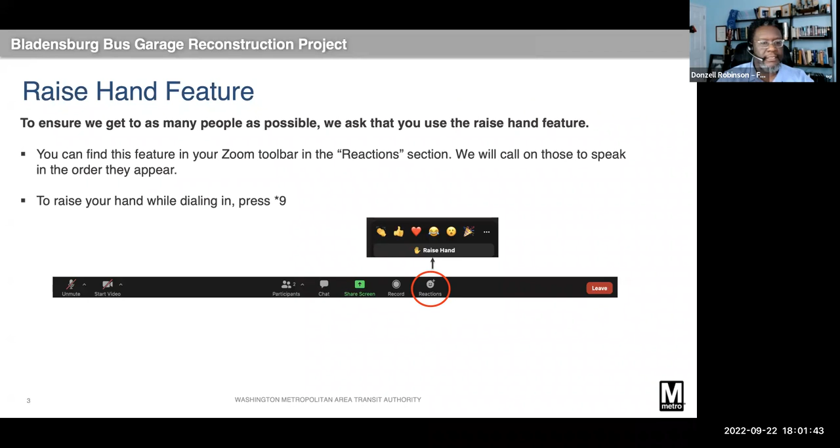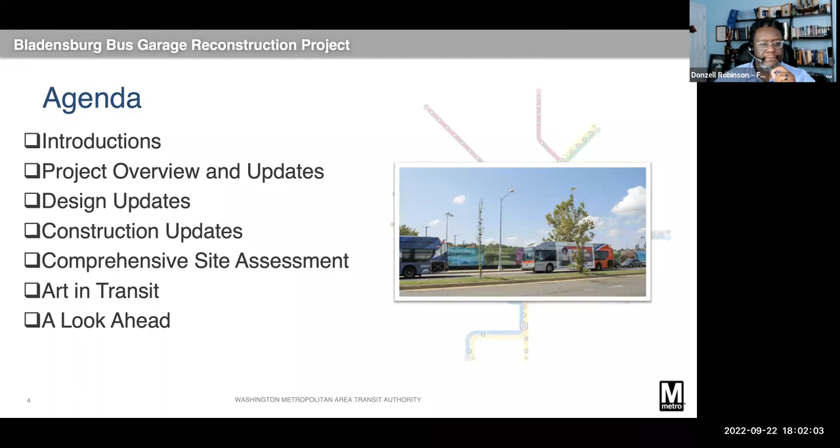This evening we are going to cover introductions, project overview, design updates, construction updates, site assessment, and art in transit, as well as next steps for the remainder of the quarter. With that, I'll turn it over to the team for introductions.

Good evening, I'm Jameelah Muhammad Ingram, and I'm here to introduce the team. We have Diana Levy, the Director of Capital Delivery; Sean Pratt, the Project Manager; myself, Deputy Project Manager; Daniel Goucher, Project Manager for Hensel Phelps; Laurent O, the Art in Transit Program Manager; and Jim Ash, the Environmental Coordinator.

I'll start out with a project overview and updates. At the last meeting, we provided an update on recent construction, design, and art in transit, and also answered questions from the community. You can visit the project website shown on screen for the recording of that meeting.

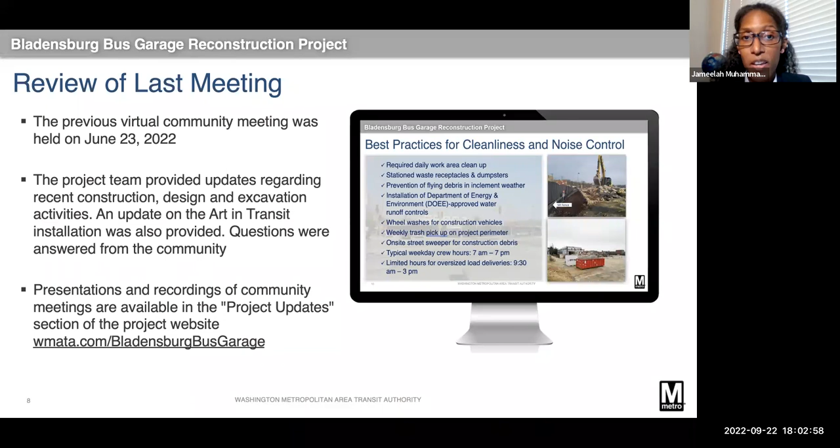Here's a recap of the project. The site will include a new maintenance facility, parking for 300 buses, and a parking structure for 560 employees. The project is being constructed in three phases. We're currently in the first phase, shown in blue, which consists of the replacement of the maintenance facility, taking place from July 2021 to August 2024.

During the second phase, shown in green, we'll focus on building the employee parking garage from August 2024 to March 2026. During the third phase, shown in orange, we'll complete the remaining bus parking on the site, taking place from March 2026 to December 2026.

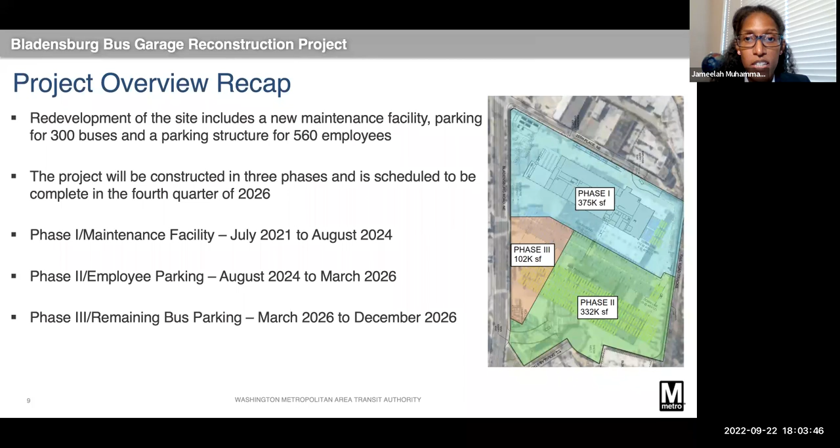Here's a reminder of the best practices we have for cleanliness and noise control. Work areas are cleaned daily, waste receptacles and dumpsters are stationed throughout the site, items are tied down to prevent flying debris during inclement weather, and DOEE approved water runoff controls have been installed.

Regarding wheel washes for construction vehicles, we received a report that this has not happened as much as it needs to, so we spoke to the contractor to further reinforce our best practices to keep the street clean. There's also an on-site street sweeper posted near the gate and on standby for construction debris, and we perform weekly trash pickup on the project perimeter. Regarding noise control, typical weekday crew hours are from 7 a.m. to 7 p.m., and we limit hours of oversized load deliveries.

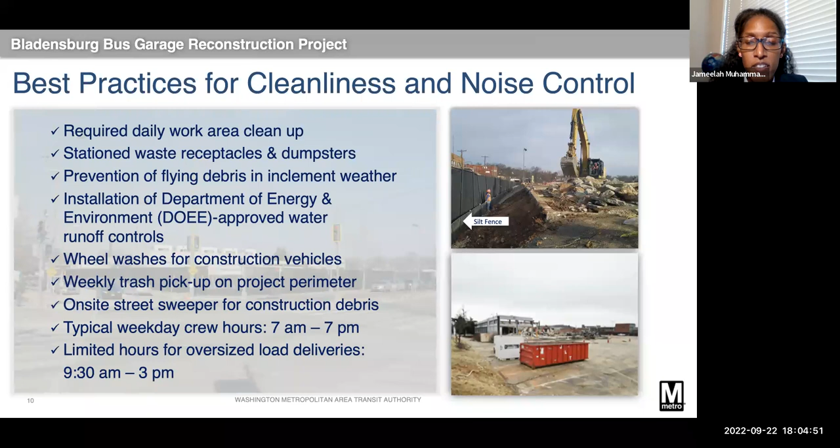In regard to contractor parking, to prevent parking congestion in the area, we now have 3 areas designated for contractor personal vehicle parking: letter A at 2122, 24th Place Northeast; letter B at 2240, 25th Place Northeast; and letter C, the properties on 28th Street Northeast.

In regard to the construction traffic flow, gate 1 still serves as the primary construction entrance, located on 25th Place Northeast. Gate 2 is the secondary entrance along Bladensburg Road Northeast, expected to be utilized more so in early 2023.

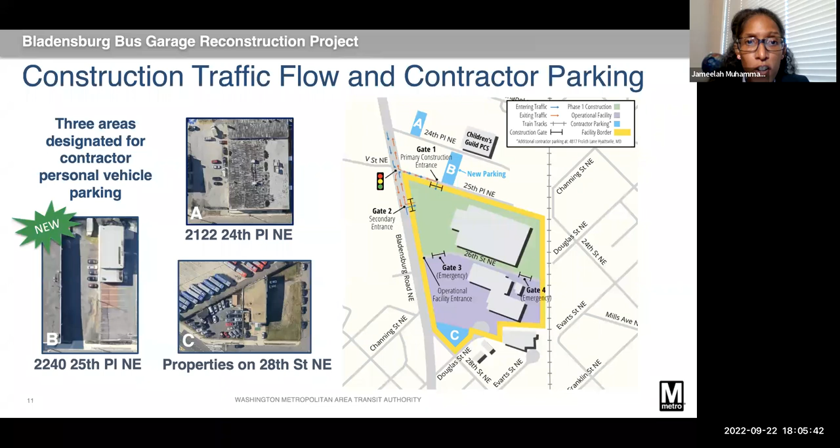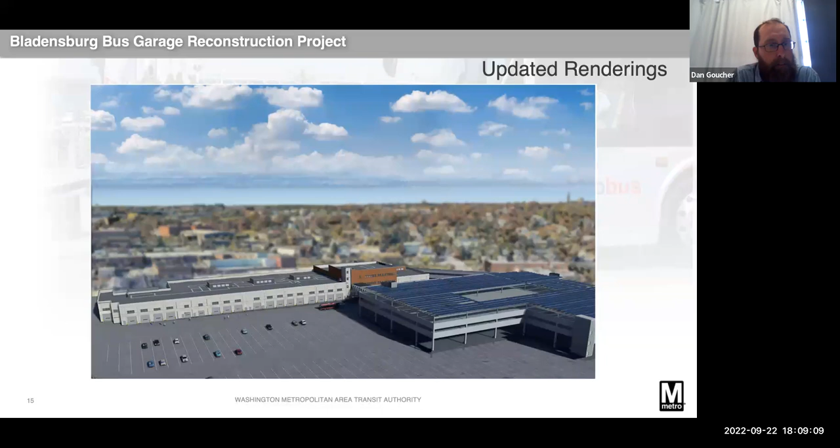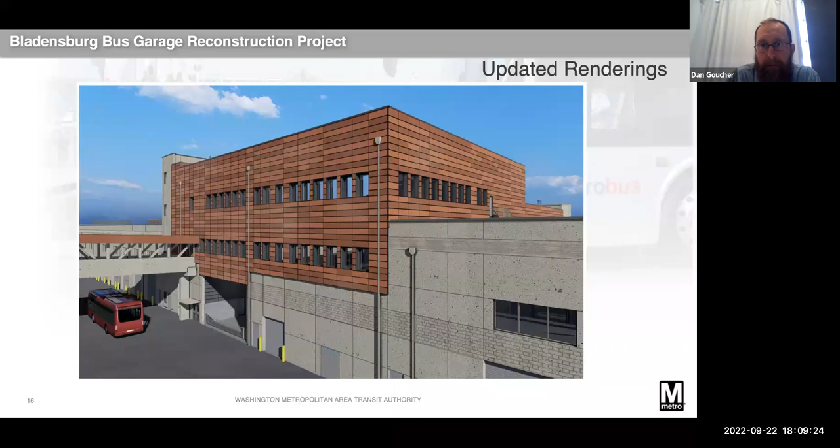Next slide. So now I'll go into some construction updates. Again, from last meeting, we talked a lot about the upcoming activities, and one of them was subgrade and grading the site.

During that operation, we encountered some unforeseen conditions. We did find some legacy foundations underneath the existing building. On the left-hand side, you can see a couple photos of that, so we had to remove those. We also ran into some impacted soils that will be talked about later in this presentation.

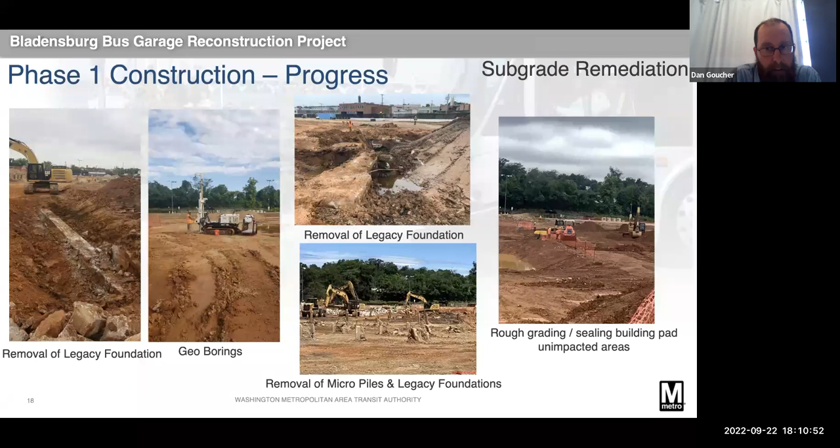You can see we had to do a number of geo borings to classify the site as far as what contaminants are there. The middle two pictures show continuing demolition of the legacy foundations, as well as, in the bottom photo in the middle, a bunch of what we call micro piles - small piles that stabilized the previous building. On the right-hand picture, you can see a lot of progress has been done. The foundations have been removed, remediation has been completed, and we are really trying to rough grade and seal the building pad to help facilitate draining water.

Next slide. We also talked about the fuel vault. At this point, the fuel vault has been completed, minus the lid on it. Previously I had shown pictures of the fuel vault being excavated, shoring was going in. So now you can see the concrete placement.

The upper left is the placement of the bottom slab. Right underneath that on the left hand, we had several wall placements - you can see the first wall placement in the bottom left. We also finished installing all the perimeter rebar. On the right-hand side, you can see the formwork and how it's installed to place the walls. Some stats: there was 71 tons of reinforcing steel installed, and we had 529 cubic yards of concrete. At this point, we actually finished that.

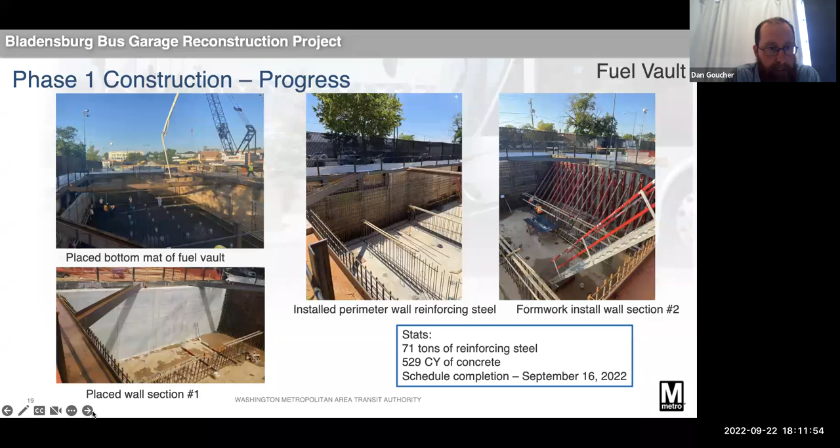Next slide. The other activity we had talked about in previous meetings was the demolition of the existing sand filter. Moving from left to right, you can see the progress of that demolition. At this point, this has been fully removed and backfilled, making way for our upcoming work, which leads me into my next slide.

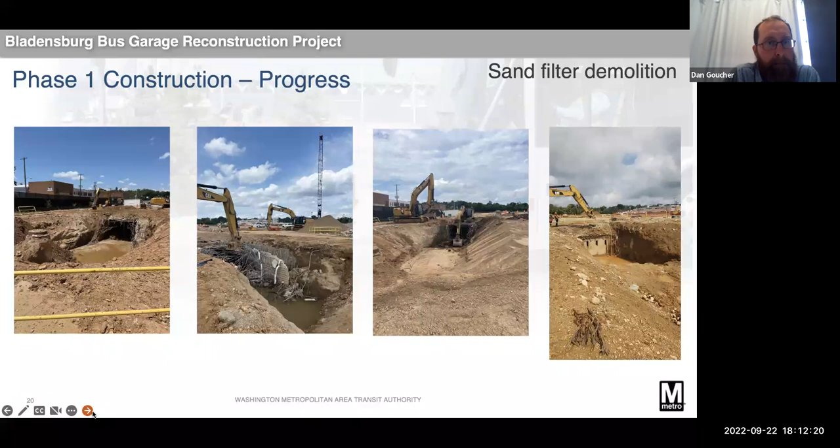So for upcoming work here in September, I know we're at the end of September, but we will complete the fuel vault. We'll start the retaining wall, kind of highlighted there right at the corner of Bladensburg and 25th. You can see that kind of green outline.

And then also in the beginning of October, we hope to get our building permit as well as start our auger cast piles. So the auger cast piles are our deep foundations, is what we call them.

They will start on the right-hand side of the picture and work their way through the site moving to the left. There's roughly about 620 piles, so it'll take about 6 to 8 weeks to complete. That will bring us all the way through December, and they should be completed in December.

And then foundation crews will follow behind them with pile caps on top of the clusters of piles and grade beam foundations.

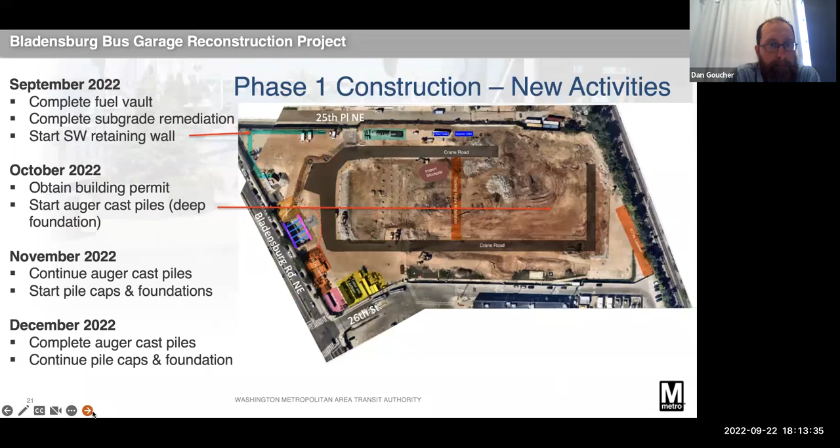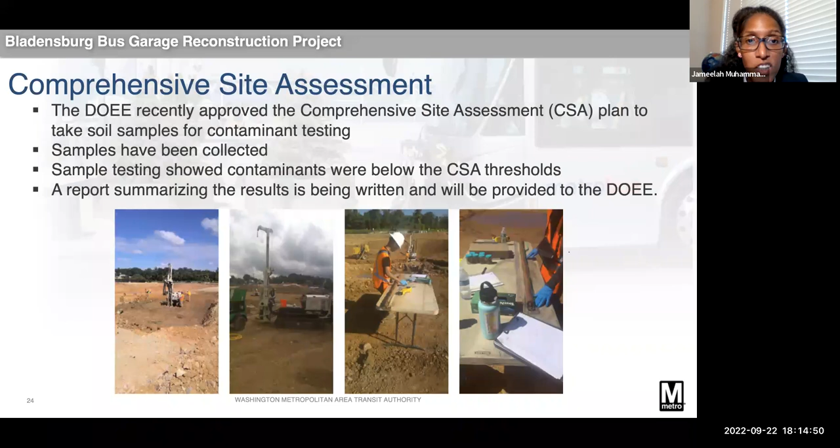I'll cover this area for Sean Pratt tonight. So the comprehensive site assessment, next slide please. The project team encountered soils impacted by contaminants. So a comprehensive site assessment work plan to collect soil samples and test the contaminants was completed and approved by DOEE. A report on the findings is in progress and it'll be provided to DOEE once it's finalized.

Any questions regarding the current conditions around the site assessment? I see you, I'm waiting for you to unmute. One quick question on the... this is Commissioner Montague, I'm sorry.

This is only for phase 1, right? Yes. So you're going to have to repeat the same thing on phase 2, right? Should we encounter some impacted soils, we would have to do the same thing. Or how could you not, well, I'm just suggesting that it will be necessary. Okay, okay, I hear you. Alright, thank you.

Thank you, Commissioner. Alright, at this time we will turn over to Laurent to talk about art in transit. Good evening everybody, next slide please.

So I wanted to give you a little bit of an update of where we are. The first one is obviously the temporary art display at the site fence, as some of you might have seen, either walking, driving, or taking the bus in the neighborhood. We've installed the banners in August. The Art in Transit project program will be working with the project team to monitor the condition of the banners and repair and replace as needed.

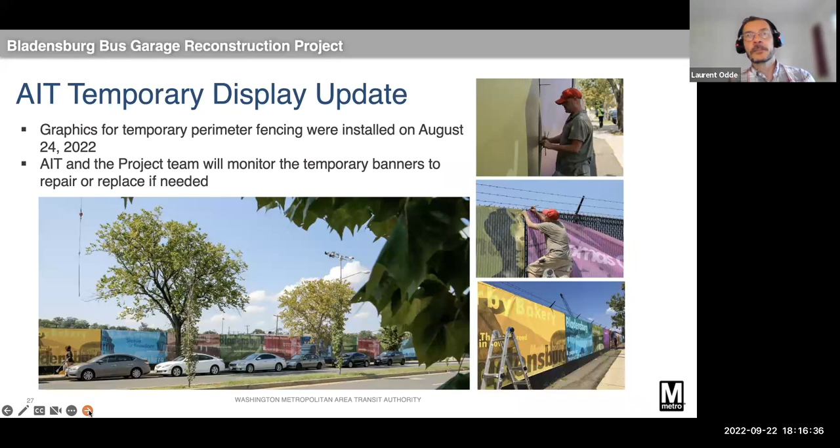Next slide. And then the next part of the planned projects for the site is the permanent artwork. We discussed that a few meetings ago. We are looking to develop permanent artwork for the site, and this will be in conjunction with the beginning of phase 2 in 2024. As part of this process, we will reach out to the community to make sure the community has a voice and is able to participate in the development of the permanent artwork.

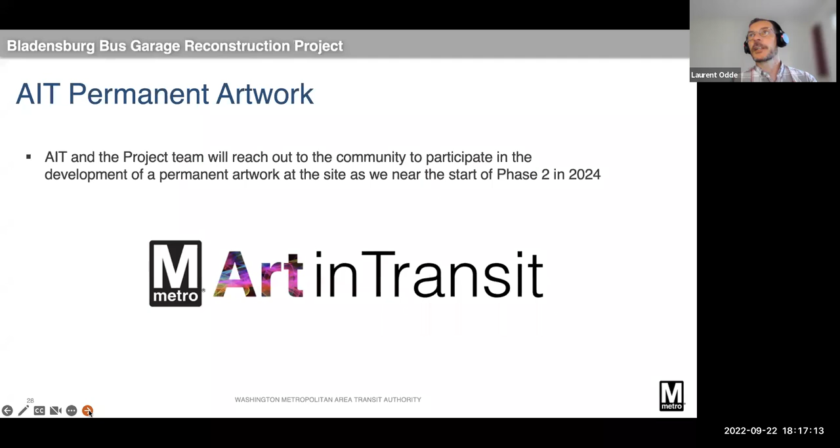And Dr., I guess I'll go back to you if we have any questions. Thank you, Laurent. Any questions regarding the artwork, or thoughts and comments? Me again.

I was past the site last Sunday, and one of the panels towards 25th Street has been unhinged on the left side bottom and folded up. So I don't know if the wind did it or if somebody wanting to see what was going on behind it did it. So somebody needs to go past that display every week to make sure the panels are in place.

We also mentioned in a small group that while I love the panels, I think the experience is better when you walk along them because it draws you and makes you really pay attention to them. But they are visually nice if you're traveling by car. They at least make you look and say, oh, what's going on over there?

The only thing, Laurent, that needs to be fixed is on the ones that have the locomotive on it, and it says B&O Railroad, it needs the date 1834 on it.

All right, so I'll address all the points you just raised. We will make sure we address the panel that seems to be loose. We'll make sure it is secured and back in place as soon as possible. We just got informed today about the comment on the date for the locomotives, so I'll look at it, discuss it with the team, and get back to you.

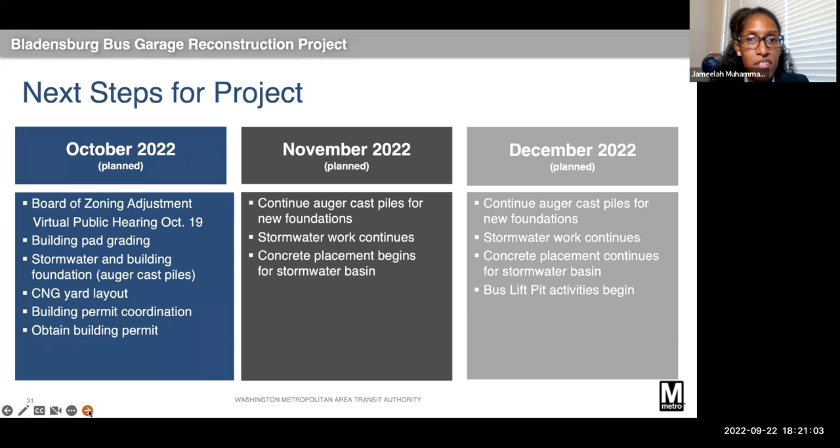Thank you so much. Any questions regarding the remainder of 2022? A couple of things - this is Commissioner Montague again. For the virtual meeting, just remember you have to say who you are.

I want for the record to mention that Jim Ash is looking into that issue with the stormwater conduit under 26th Street, so we're trying to establish what the exact location of that is. And for the record, since there's a difference, we need to be exact about what was presented in the earlier maps versus what actually is. We need to really know what utilities are located where on that property.